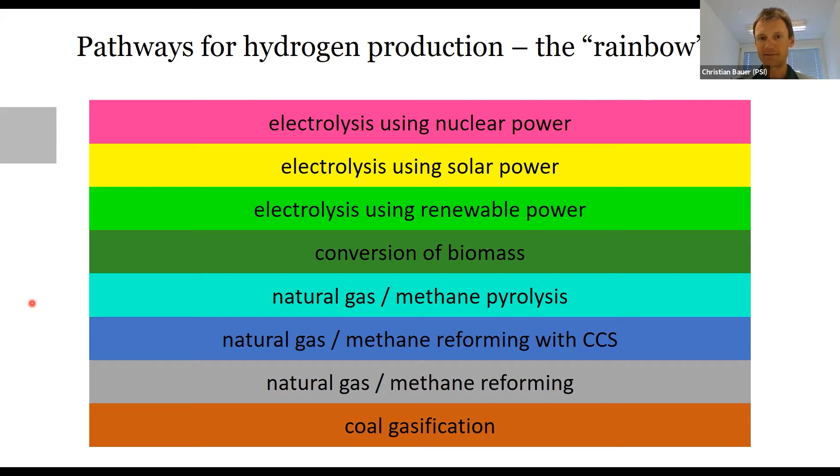And in my talk now, in the 15 minutes I have, I will focus on those pathways, basically electrolysis using renewable power, or also some current power generation mixes, a few words about biomass conversion, and then more on the natural gas conversion pathways with and without CCS, because basically in the public discussion, it's often a kind of competition between the green hydrogen using electrolysis and renewable power, and the blue hydrogen with natural gas conversion with CCS.

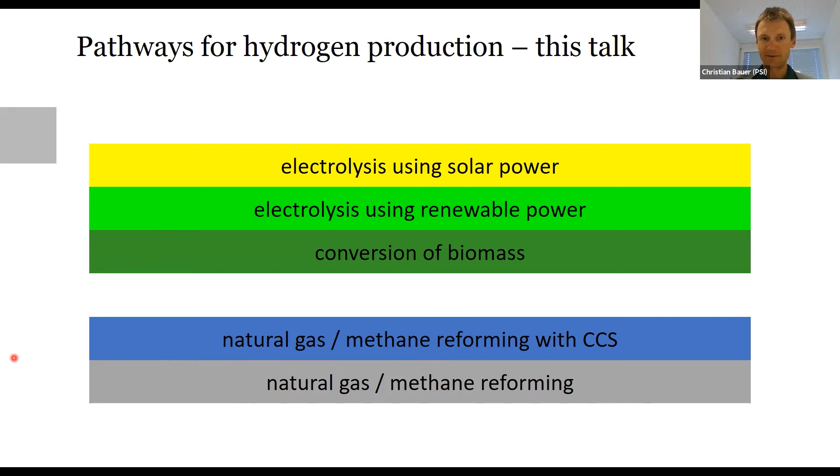And I think that's not always very productive. And I think I can provide some facts for decision making also. And that's the goal of this talk today. So what do we have to do when we want to quantify the greenhouse gas emissions of hydrogen production? Well, basically, we have to perform something which is called life cycle assessment.

And the key aspect of life cycle assessment as such is that it quantifies the environmental burdens along the whole life cycle, as the term says, of a product, of a service. And that means that all material and energy flows along the life cycle from the production of a good or service, its use and its end of life are taken into account. And with such a comprehensive perspective, one can basically compare different products and services in a balanced way, and quantify not only greenhouse gas emissions but also other environmental burdens. But for the sake of this talk, I'm focusing on greenhouse gas emissions.

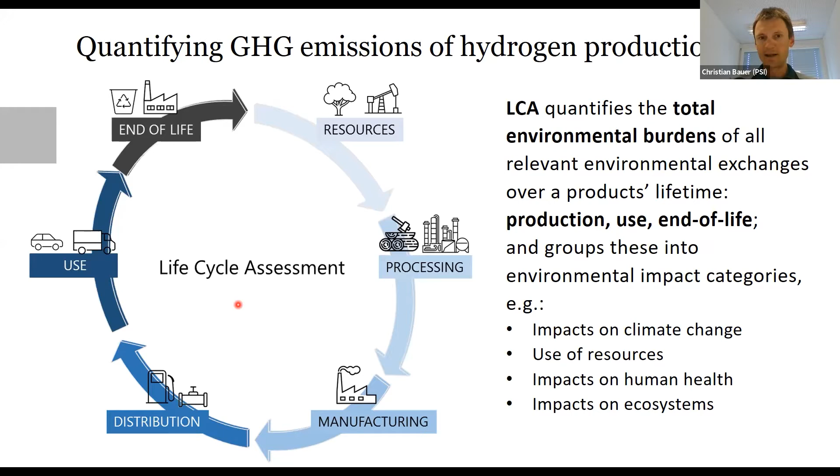Now, if you think about this concept a bit more, then you realize quickly that in the end, it's a complex exercise. Just think about washing your clothes. That needs a washing machine which needs to be produced and operated, and then probably recycled at the end of its life. Operation of the washing machine needs electricity, for example, from a wind turbine. This needs to be produced, operated, and then recycled at the end of its life.

All the components of both the wind turbine and the washing machine need transport activities, and also the lorries have to be produced, operated, and disposed of. And maybe in all this some web service is included. That's why you need some internet, and also that has to be taken into account.

And in the end, it turns out that life cycle assessment basically always tries to represent the whole economy in a way, because all those processes are interconnected. And of course, in the life cycle of hydrogen production, not everything is equally important. And I will show you the most important elements in a minute.

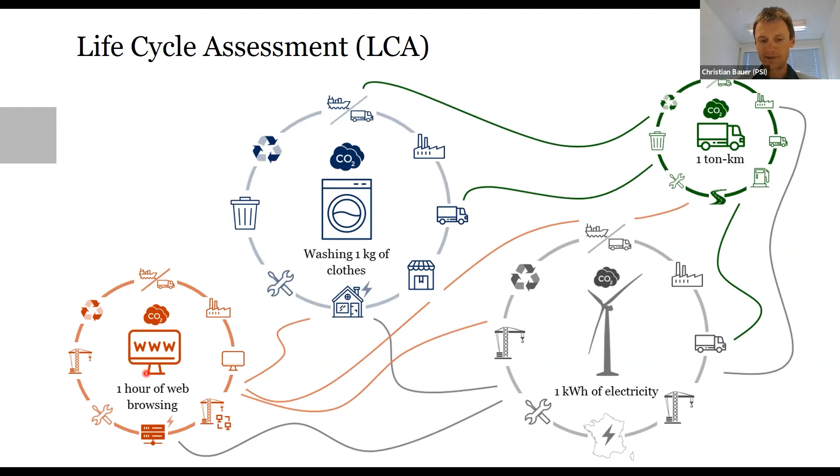But now back from the washing of clothes to the focus of my talk. Basically what I want to present is a comparison in the end of greenhouse gas emissions associated with hydrogen from electrolysis, with the greenhouse gas emissions associated with natural gas reforming, with and without CO2 storage, and a few words about the biomass conversion pathways as well.

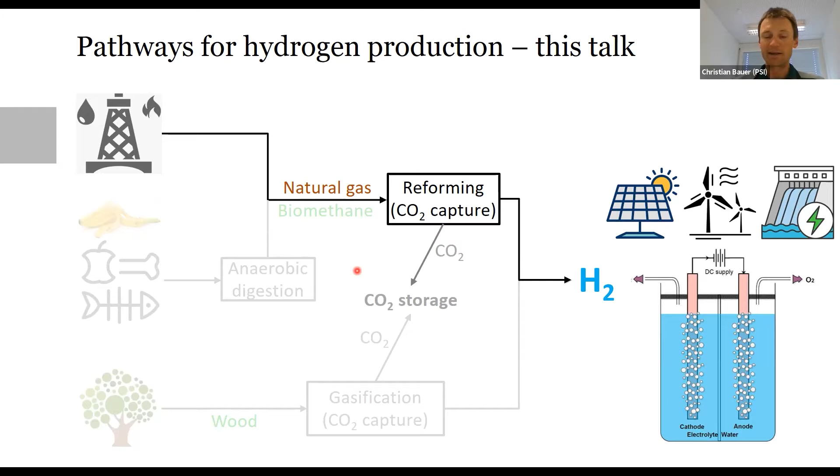But in the context of biomass conversion, one always has to take into account that the resources, the sustainable biomass resources, are very limited, and there's also competition for other uses. So in the end, if we think about large-scale hydrogen economies, I think only these two pathways are realistically able to provide or to supply large amounts of hydrogen, which might be used in the future.

So key parameters in the life cycle of hydrogen production, either from electrolysis or from natural gas reforming. Well, for electrolysis, it's actually pretty simple, because the most important factor is the greenhouse gas intensity of the electricity consumed, and the, let's say, fixed contribution from the infrastructure construction, like the electrolyzer, is relatively minor in terms of impacts on climate change.

That's why, if one knows the electricity source used for electrolysis, then it's basically already answering the question whether the hydrogen produced from it is low in terms of carbon emissions or not.

Of course, if we think about electrolysis directly coupled with renewable electricity generation, then today at least it's not really profitable or in any way economic, and that's why often this electricity from the renewables is supplemented with some electricity from the grid, and that also has to be taken into account in the overall carbon balance.

Hydrogen from natural gas with CO2 capture and storage is a bit more complex in its life cycle assessment, because there are basically two, or one can also say three, key elements in that. One is the CO2 removal rate at the hydrogen production unit, with different options there in terms of technology and CO2 capture rates. And the second very important factor here is the methane emission rate along the natural gas supply chain.

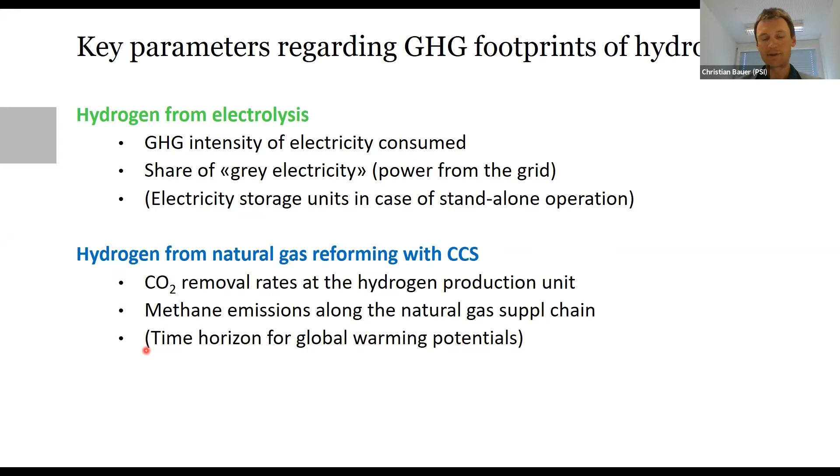And then this third point here in brackets: if there are substantial methane emissions along the natural gas supply chain, then also the time horizon for the global warming potentials becomes important, because if we compare the 20-year time horizon to the usually used 100-year time horizon for quantifying global warming potentials, then we realize that there's about a factor of 3 in the impact of methane, and that's why these methane emissions along the natural gas supply chain become much more relevant if we look at shorter time horizons.

So that's what I've mentioned already before. Electricity production related greenhouse gas emissions are the key factor for electrolysis. And what you see here, I guess most of you are familiar with that, is that coal power has the highest life-cycle greenhouse gas emissions per kilowatt hour of electricity, followed by natural gas, and with some margin then at the lower end, all the renewables and nuclear power.

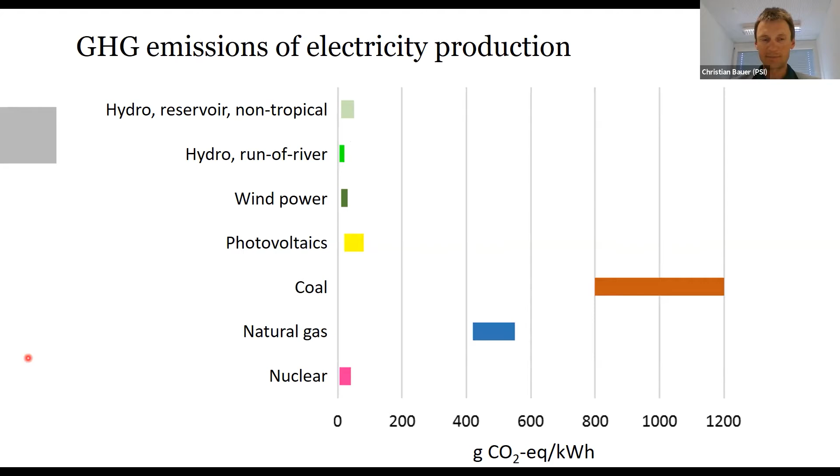So it's basically showing that if we operate electrolyzers with this kind of electricity, then the hydrogen can be considered as low carbon fuel or feedstock, and that will become clear in the next graphs.

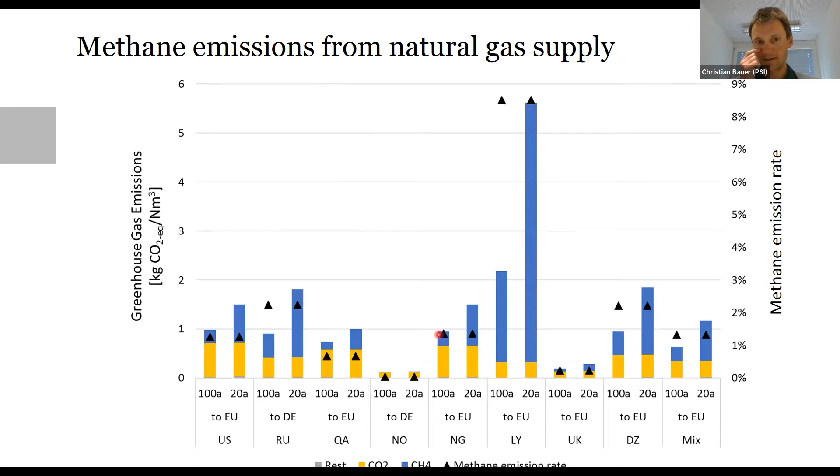So the 8% was this dysfunctional natural gas infrastructure. The 1.5% corresponds about to the current European supply mix, which has substantial shares of imported gas from Russia, and that's why emissions are not close to zero here. And the 0.2%, I think, is the goal of the natural gas extraction association or something like that. So Norway, the Netherlands, UK would be in this order of methane emission rate.

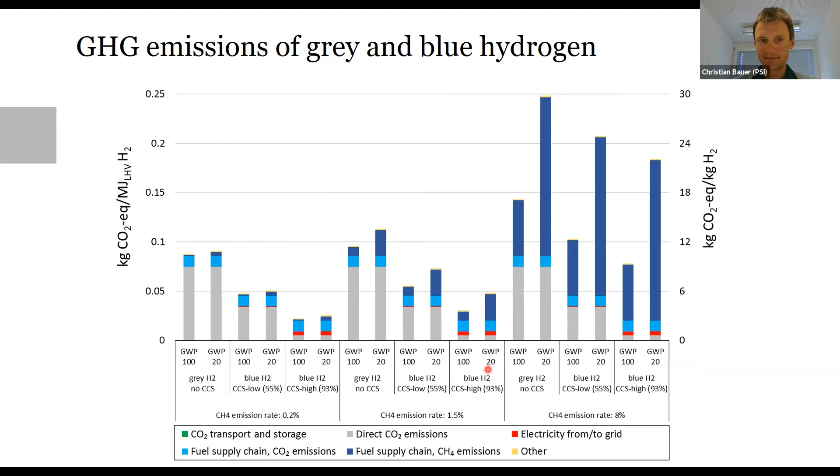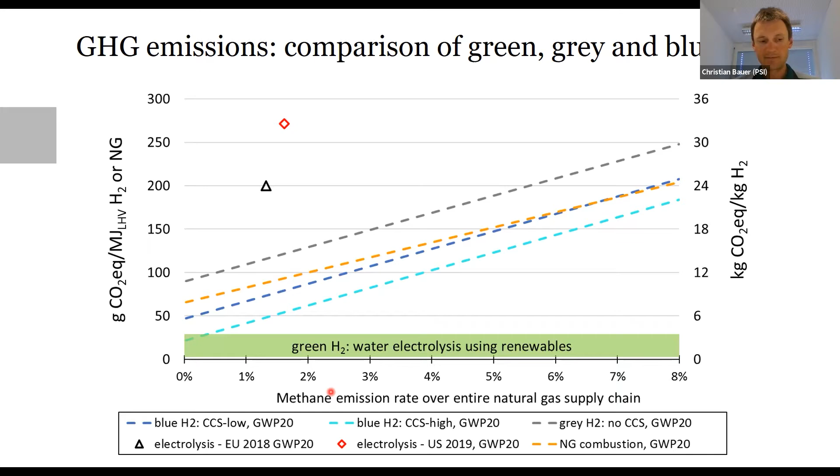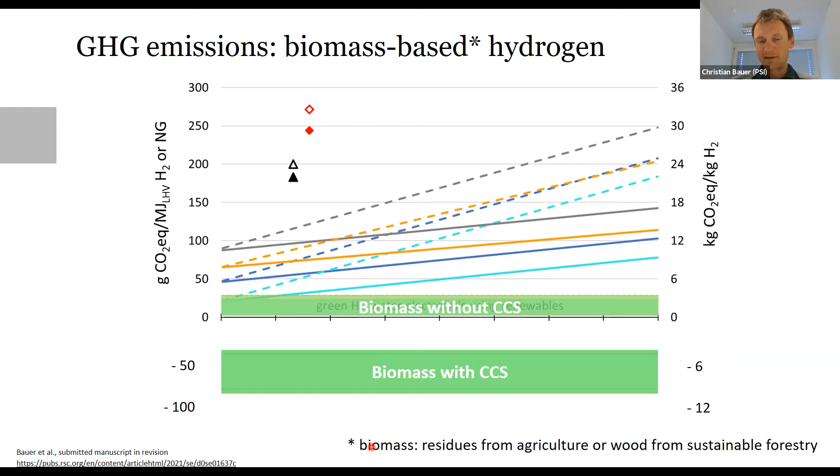So those cases are not included in this graph, but it basically shows that if one uses such kind of biomass with CCS, then one can generate negative emissions by removing CO2 from the atmosphere. I think even if this kind of biomass is a limited resource, it's still an important lesson to learn.

So with this, I think I'm in any case running out of time, so I will finalize with some key messages and some comments in the larger context. What I was trying to show and hopefully showed is that blue hydrogen definitely can qualify as a low carbon energy carrier or feedstock under the condition that the methane emissions along the supply chain are minimized, optimally below 1%, or the lower the better, of course. And then we need at least 90% CO2 removal rate at the hydrogen production, and I think this is feasible with current technology.

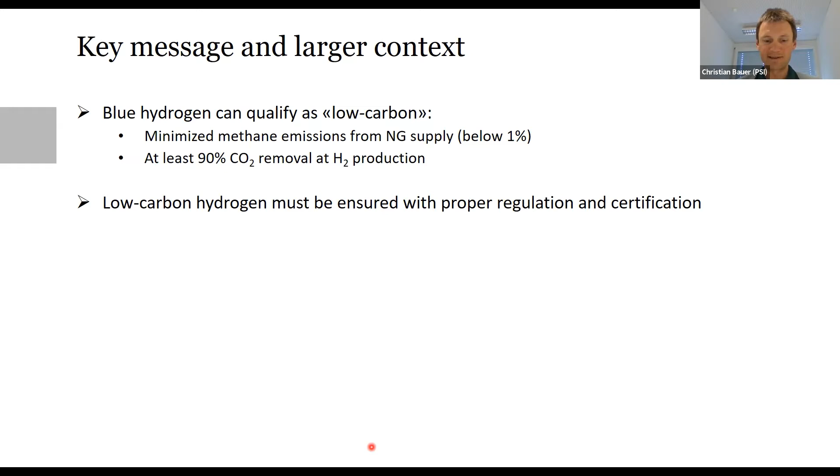But there's a but. These conditions have to be ensured by proper regulation and certification. And I think that's really important because, from a personal perspective, in any kind of industry which wants to go green or climate friendly or low carbon, we see that some greenwashing activities are taking place. And I think we really have to make sure that this doesn't have a negative effect on the true climate balance and climate impacts of hydrogen, because if we're talking about a hydrogen economy on a large scale, we really have to make sure that the hydrogen used there is climate friendly. Otherwise it doesn't make sense to use it as a measure against increasing temperatures.

Since both blue and green hydrogen qualify as low carbon energy carriers, I think they can and should play important roles. To which extent they will develop depends a lot on costs and CO2 pricing, and also ability of the industry in terms of scaling up their production. And finally, as a concluding remark, hydrogen needs to be supplied in large quantities for achieving these net zero goals. And the most promising use sectors, from my perspective, will definitely be industry and aviation, maybe also shipping and long distance road transport.

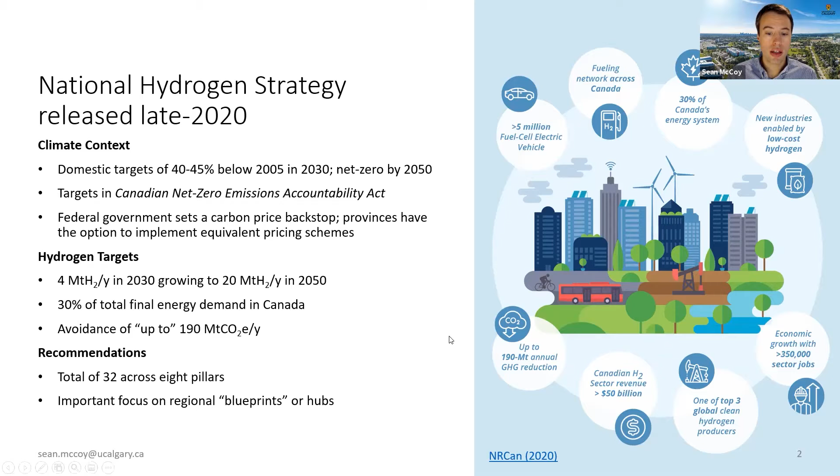They then make recommendations, a total of 32 of them, spread across 8 pillars. They include strategic partnerships, de-risking investments, innovation, codes and standards, enabling policy and regulation, awareness, regional blueprints, and international markets. And I think the most important thing, personally, for the Canadian situation is this idea of regional blueprints, which I think you could translate to hubs, thinking about development of hydrogen hubs in Canada. So let's take a quick look at where across Canada things are with respect to those sorts of hubs.

For example, Quebec, Labrador and Newfoundland, in fact, as well, but Quebec and Manitoba, and to a certain extent Ontario, these grids tend to be generally low carbon intensity already today, with large hydroelectric resources. If you took the average across Quebec, Ontario, and Manitoba, it would be probably close to zero in terms of operational emissions. Then you have to add in properly the life cycle emissions from, for example, hydro reservoirs in Quebec, and fuel chains and things like that.

Nuclear, there's a lot of nuclear in Ontario. So this would be very low, nonetheless, low emission electricity. If you looked at Christian's graph, it would be grid intensity that is quite low, getting towards where you have this sort of green hydrogen number start appearing in his plots.

And if we look over to Alberta and Saskatchewan, on the other hand, we see a much higher CO2 grid today with strong use of coal, particularly in Saskatchewan. Many of you know that's where the Boundary Dam CCS project is. Unfortunately, they've only done that on one plant, and they have many other coal plants that are unabated. There is a plan to phase out coal across Canada. Alberta is well on its way to doing that. Saskatchewan is less excited about that plan. But right now, the grids are very high CO2 today.

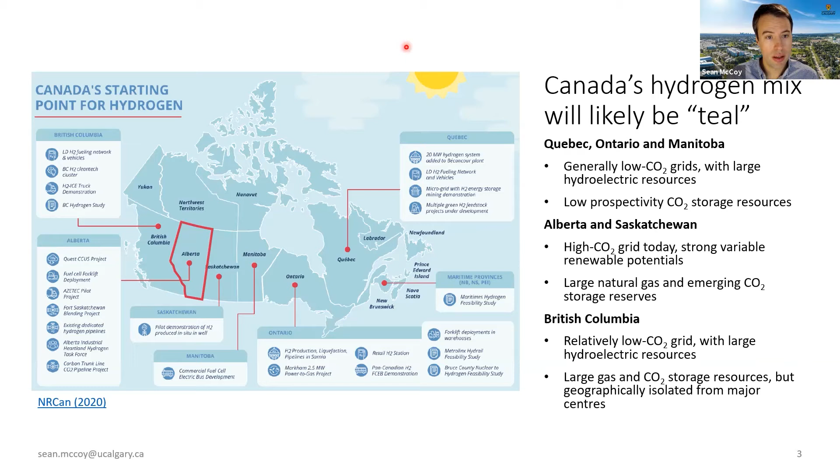And so let's jump into taking a look at the Alberta situation now. The existing hydrogen market in Alberta is enormous. Right now, we have something like 5,400 tons a day of hydrogen that we're producing, primarily from natural gas. Now, this is not hydrogen for mobility. This is not hydrogen as an energy vector. It's hydrogen as a feedstock for heavy oil upgrading and refining typically. But we also use maybe 10 or 20% for fertilizers and methanol production.

There's about 2,000 tons a day of hydrogen being produced there, and we already have production of blue hydrogen happening. Now, this blue hydrogen would be what Christian referred to as sort of a low capture rate. This is from the Shell Quest project, which is at the Scotford Upgrader.

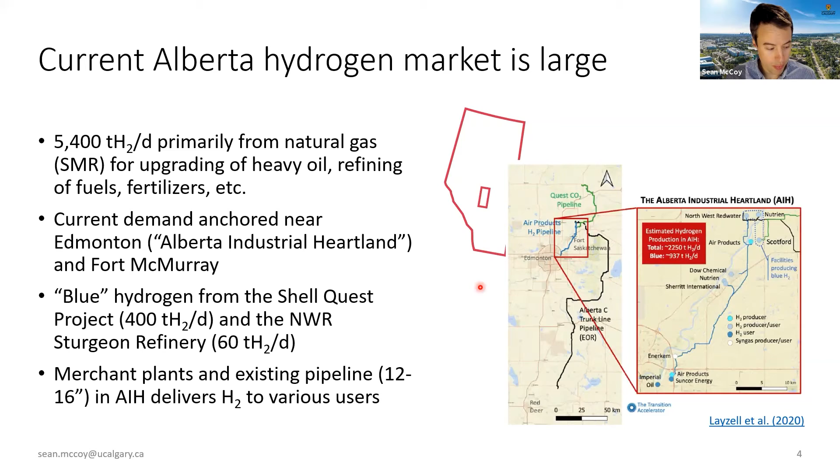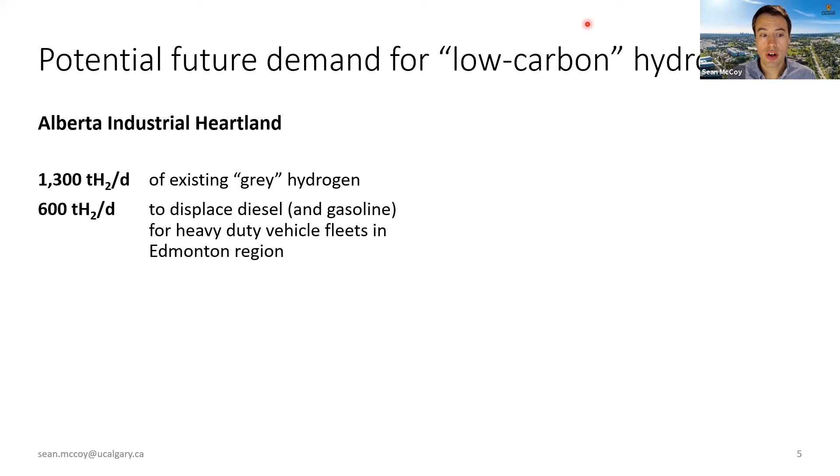So what would the potential demand be? I've talked about there being 5,400 tons a day of hydrogen being produced in Alberta. What would the potential demand look like? Based on some studies done in the Alberta Industrial Heartland by a group called the Transition Accelerator, which has been specifically formed to do this work, and I was an advisor to this one, we guessed that there was about 1,300 tons a day of existing gray hydrogen, 600 tons a day of hydrogen that could be used to displace diesel use, and potentially some gasoline, in heavy duty vehicle fleets in the Edmonton region. And we looked at this from a number of different angles, so this is a pretty robust number.

And potentially 1,500 tons a day for space heating. Now, whether that makes sense, I think, is a really interesting and open question. And it's highly variable, because in the summer we don't have much demand. In the winter, we have lots. When it's minus 40, the challenge is a heat pump looks a lot like a resistance heater. So there may be a case for some hydrogen in the gas grid here. And in fact, there are some projects looking at doing that injection.

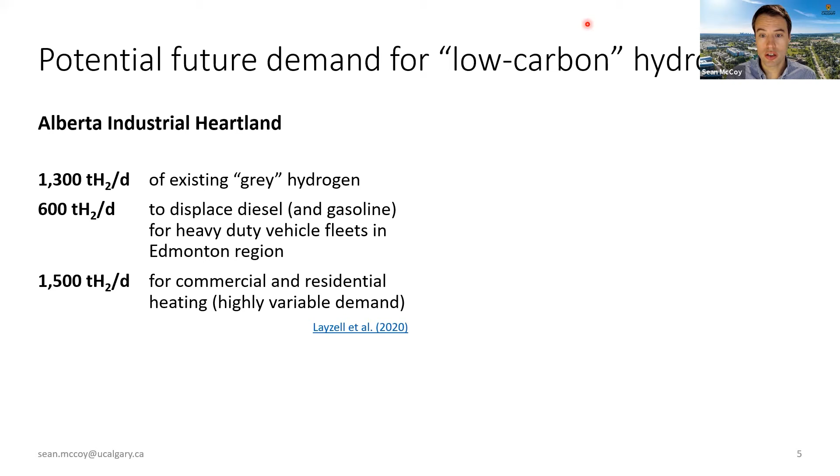If we went up to Fort McMurray, based on some numbers that a grad student of mine has run, there'd be something like 2,000 tons a day of existing gray hydrogen that could be switched to blue. Hundreds of tons a day of hydrogen could be used to displace diesel. And it's actually not diesel, it's a distillate fuel that you couldn't put in your car and call it diesel, but it's used for oil sands mine trucks. So these are the enormous dump trucks that are moving around bitumen, well, actually the sand containing the oil.

And then there's almost 15,000 tons a day of hydrogen that could be generated to displace natural gas for oil sands process heat. So for decarbonization, basically a distributed pre-combustion capture system. Whether that makes sense is a really interesting question. The companies and consortiums are actively looking at that now, and it's competition between CCS on the sites or hydrogen being moved to those sites.

And we've actually done some work, and I was on that, and I've been pretty surprised that unfortunately the cost of getting hydrogen all the way up there, or building hydrogen production all the way up there, makes it a little more expensive than you might think. But of course, there's an unknown export potential of hydrogen, ammonia, synthetic fuels, and so many caveats here, of course.

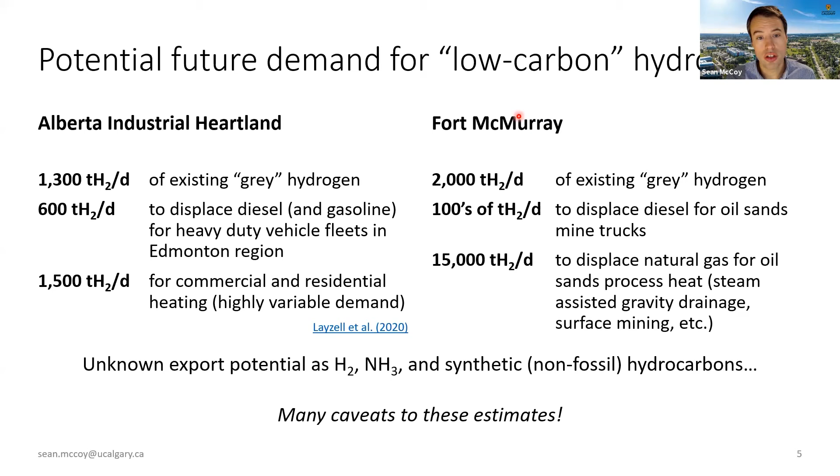But if I added this all up, this would be about 3,500 tons a day in the Alberta Industrial Heartland, or 1 million tons a year of hydrogen. And Fort McMurray could be like 6 million tons a year if you really thought about using it for fuel gas. So these are huge chunks in that 20 million tons in 2030 number. And we're actually taking steps to doing that now. So there have been multiple projects here announced in Alberta. This isn't an exhaustive list, but I think I've captured all the big ones.

Right now, we have projects being proposed, 4 of them that are really notable, that range in capacity from 1,500 tons a day at the large end down to maybe 500 tons a day. And these are estimates. Some of the projects are quoting per year. This Shell Polaris project doesn't actually tell you how much hydrogen they're making. They just tell you how much CO2 they're going to catch, interestingly.

And they range in where they're going to be going, from refining. You see a lot of these going into refining. So these will be replacing that 1,300 tons a day of gray hydrogen that's currently used. Some being talked about injection into the gas grid. And this Air Products plant's talking about having liquid hydrogen for vehicle fleets, a small amount that would be directed there, and presumably the rest into other sort of merchant uses.

And there is one project by Mitsubishi and Shell that's been proposed. It's not really clear where it sits, but it was a very recent announcement where they want to move the hydrogen to export markets as ammonia. So very interesting emerging slate of projects here. If you added all this up, this is something like 3,000 tons a day of hydrogen, I would guess, including the unknown from Shell. So this approaches the total demand that we estimated for the Alberta Industrial Heartland, which is quite interesting.

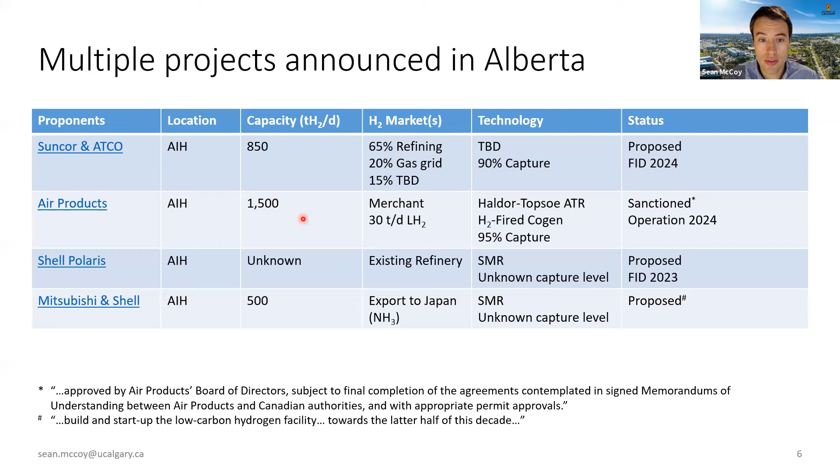These projects, if you added up this capacity, need about 10 million tons a year of storage. So the question is, do you have that? And the good news is probably. So Western Canada has been the site of study after study on storage. If any of you works in storage, you know that Stefan Bachu has studied the Alberta Western Canadian Sedimentary Basin extensively. And so there is a lot of capacity. The basin extends from northern British Columbia through to southern Saskatchewan, and into the US, but in that Canadian section, you'd see something like 300 gigatons of potential capacity.

Of course, that's potential. It's a resource, not a reserve. And so additional work is needed to get there. The positive news is that we are doing that work now. We probably have tens of millions of tons a year of work that's been done to demonstrate real injectivity. We have a law that governs access to the subsurface. That's been clear for many years. We have a system for post-closure stewardship or post-closure liability management, and the regulator has the tools.

The challenge, however, is that recent government moves have created some uncertainty here. They've announced a new process to access the pore space. And what you've seen is there are a whole bunch of hydrogen announcements and everything's gone on hold while the government goes through a request for information and a request for proposal process, because in a nutshell, they're trying to force creation of hubs by the way they allocate the rights to storage in the subsurface.

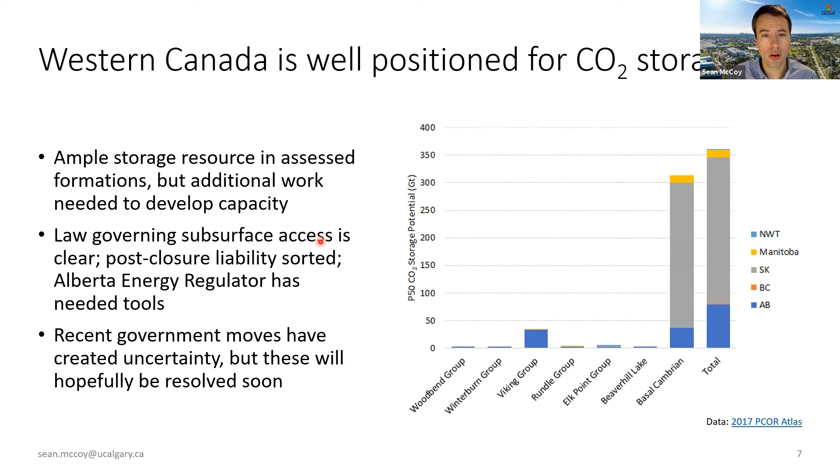So they're not doing a call saying build a hub, we'll support you. They're saying, tell us you're going to build a hub, and if you are, we'll give you access to the pore space storage rights. So it's interesting to see how that's all going to work out. Very different than things have been done here before or anywhere else in the world, I think, at this point in time. So we shall see.

So I guess let me end up here. I'm probably a little over time. Let me end up with some thoughts on where Alberta goes from here. And I think this ties a little bit back into what we just saw from Christian.

So first, I think we need to acknowledge that hydrogen here in the province is a response to climate change, and we don't need to kid ourselves about that. Climate, and our response to it, is a very difficult conversation here in this province. And we really need to be therefore thinking about the whole cradle to gate, particularly on our upstream gas.

While I think Alberta has done a pretty good job of managing upstream gas, at least in terms of its regulations, that is the methane emissions that Christian was talking about, we need more measurement to really verify this and be able to demonstrate it to the world and sell a truly low carbon hydrogen if we're going to do it globally and make sure we're meeting our commitments domestically.

The second is that we need to really continue pushing development hubs and start figuring out where the markets make sense and are economically viable and what it's going to take to develop them. Right now, it is really hard to see, for example, with that Air Products reformer at 1,500 tons a day, where that hydrogen goes. Certainly it can go to replacing some of the gray hydrogen, but that gray hydrogen is already being supplied. So it's sort of, I think, additional.

And the question is, where's that additional hydrogen going? What makes sense? How do we get it? How do we get the markets developed? We certainly need more investment in CO2 storage. I think anyone in the CCS community would probably say that's of course.

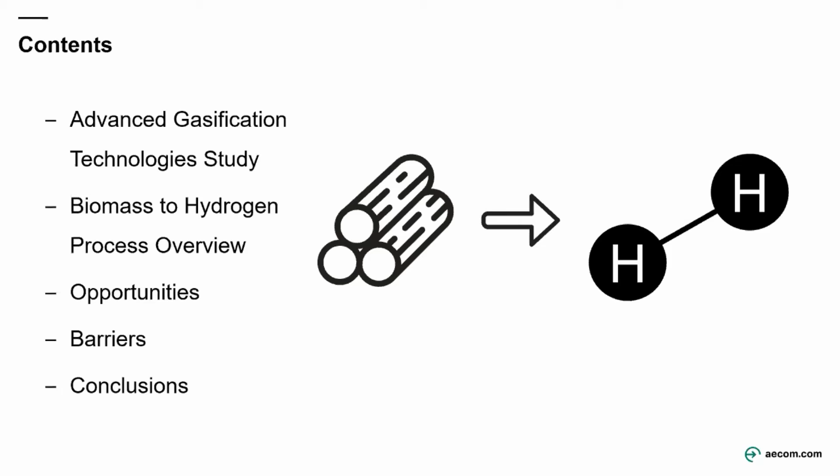Okay, so thanks very much. My name is Stephen Florence. I'm a senior engineer at AECOM in the energy transition team. And I'm going to talk to you a little bit on hydrogen from biomass and a study we did to do with advanced gasification for the UK government. So I'm going to run through a bit about the study, give a sort of process overview of the biomass to hydrogen, and go through some of the opportunities and barriers for these technologies, and give you some of the conclusions.

So the study itself was called Advanced Gasification Technologies, looking at converting biomass and municipal solid waste to a range of fuel products, including hydrogen, but also methane, methanol, and FT fuels. The study also encompassed the current status of the AGT technologies, as well as looking at the next generation of technologies being developed.

Then the later part of the study performed some techno-economic analysis of various options for the technology for each of the different fuels. And there was a particular focus on looking at the opportunities and the barriers to bringing these technologies into fruition, essentially. And this work was conducted with Fichtner Consulting Engineers as well, and was performed for the UK Department of Business, Energy and Industrial Strategy.

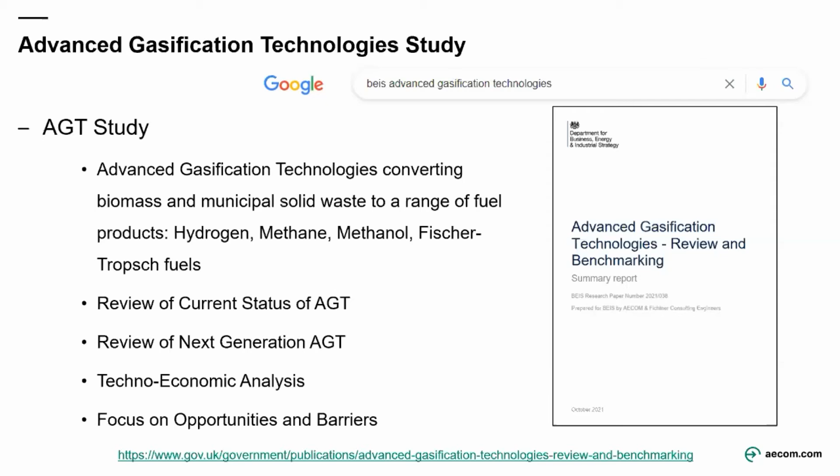So some of the key messages coming out of our study was that the CO2 balance should be studied further. There's a lot of potential in this area, and we'll touch on that later in the presentation. A realistic approach to feedstock availability and utilization is required. We don't want to be taking biomass that has better uses away from those to use it here, essentially. And again, we'll touch on this a bit more.

And the other big takeaway was that the technology is still very much in a developmental stage. It's not fully commercialized. It's not a mature technology necessarily at this point in time.

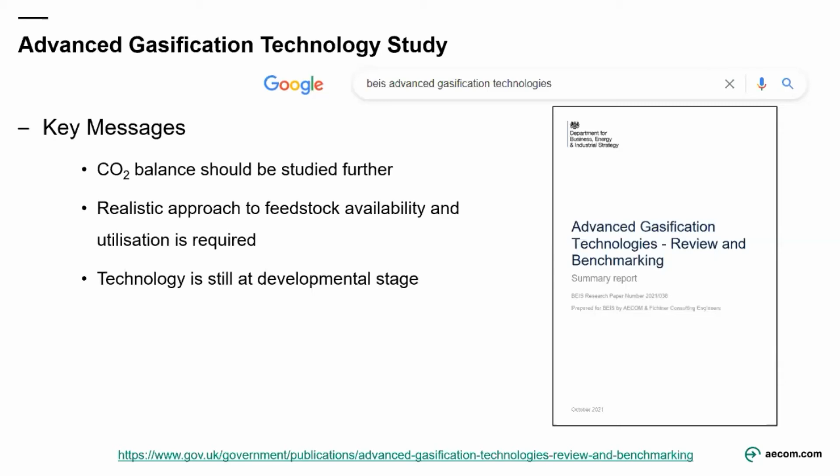Depending on the biomass source, you could have quite a high moisture content, or potentially you could have a drier source. One of the key messages on the feedstock preparation is the cheaper you go on the feedstock that you bring in, it might look economical at first, but it's going to lead to an increased level of contamination in your feedstock, which will lead to an increased complexity on your preparation, which is then an increased risk to your process and potentially an increased cost. So things like wood pellets will be far easier to process than, say, municipal solid waste.

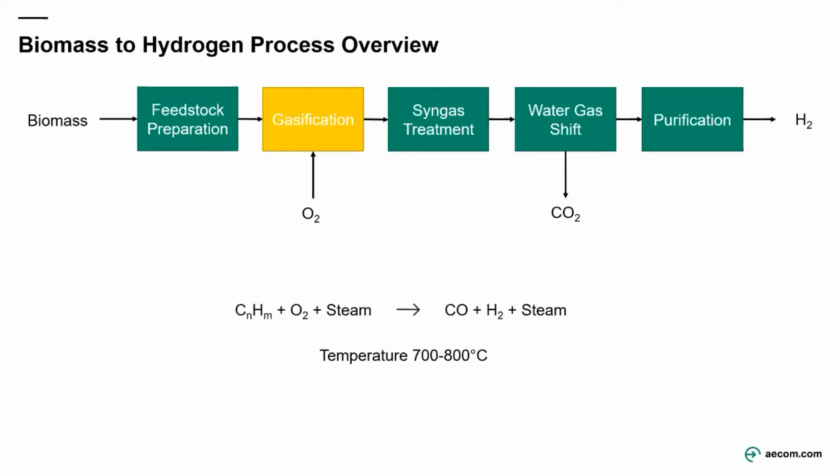Moving on to the gasification. This is the core technology. There's a few different types: fluidized beds, entrained flow, fixed beds. The study mainly focused on fluidized bed technology. Essentially in your gasifier, you're taking your feedstock hydrocarbons, whether it's from wood pellets or municipal waste or wood chips, exposing it to oxygen and steam at temperatures in the range of 700 to 800 degrees Celsius, and then oxycombusting to gasify it to a syngas, where you're trying to optimize the concentrations of carbon monoxide and hydrogen in that syngas.

From your gasifier, you then move through into the treatment of your syngas. There's various options that you might apply to essentially help remove contamination. You could have cyclones for removing entrained particulates and droplets, scrubbing to remove tars and ammonia, activated carbon beds for removing metals, and so on. I won't go through all of them there.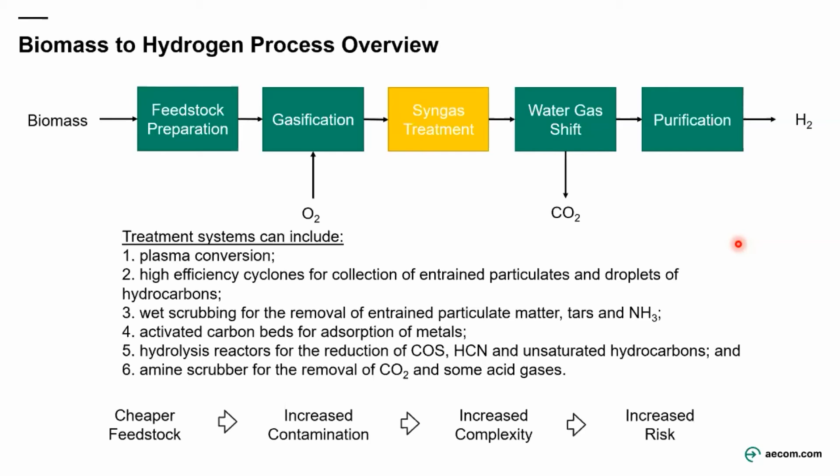But again, this ties back into that original message on the feedstock preparation, that if you go with a cheaper feedstock, you're going to have an increased level of contamination coming through your process, and that's going to lead to an increased complexity in your treatment to remove these contaminants, and then an increased risk to your project just due to the complexity, more stuff to go wrong, more things to remove, etc.

So your treated syngas then moves forward into a water gas shift reactor. Here the carbon monoxide and the steam are shifted, so you produce your carbon dioxide and hydrogen. There's two forms of this water gas shift reaction. You have a low temperature version, which uses a cobalt molybdenum catalyst at around 200 degrees, and you have a high temperature version, which operates around 500 degrees Celsius and uses a chromium or copper promoted iron oxide catalyst.

The CO2 that is produced in the water gas shift is removed using a solvent-based process, and it produces a very concentrated stream, typically over 90% CO2, which is therefore very optimal for capture and sequestration, or potentially utilization as well. So it's very advantageous for capturing the CO2.

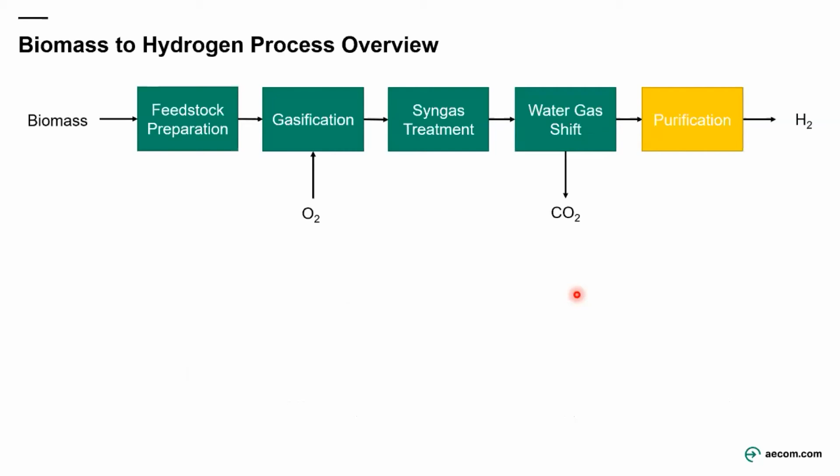The final block of the process is the purification of your hydrogen from your gas shifted syngas. This is typically done using pressure swing adsorption, followed by further purification steps as may be required to meet your end use for the hydrogen. This is where other technologies such as electrolysis might have an advantage in being able to produce a purer hydrogen without further processing. But there are industries where it's still very much applicable to use the hydrogen from pressure swing adsorption. Things like steel production will probably be a good target for this technology.

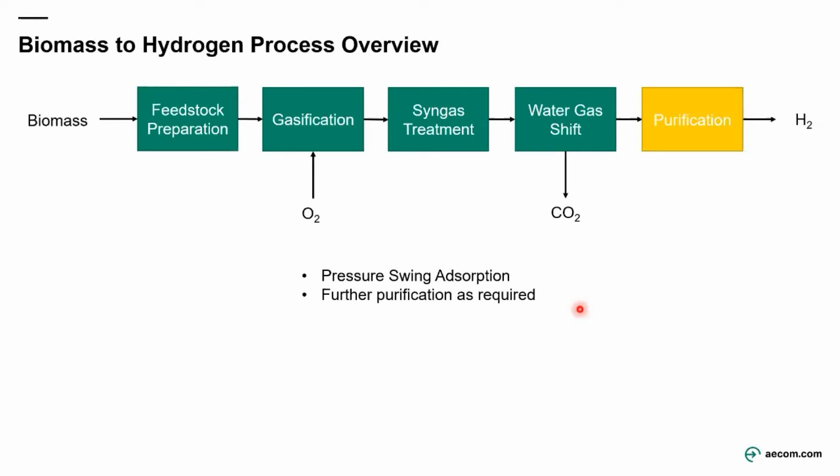So currently, there's a few companies operating in this area, looking at converting biomass and biomass-derived fuels into hydrogen. One of these is a company called Kew Technology. They use a feedstock of densified refuse-derived fuel, their gasifier is a fluidized bed, and they're targeting producing hydrogen, but they're also interested in producing electricity and liquid fuels.

In the course of the study, their current development status was assessed, and currently they're sitting around a technology readiness level of 6. So it's proven in a relatively similar environment, but the whole process overall has not been proven at a commercial scale and environment.

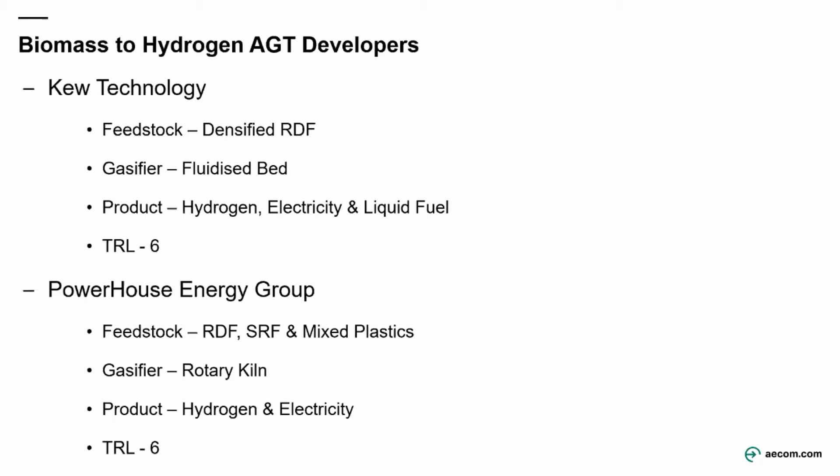Then another developer looking at biomass to hydrogen is Powerhouse Energy Group. Their feedstock is made up from refuse-derived fuel as well, but also solid recovered fuels and mixed plastics. They use a different type of gasifier, a rotary kiln, and their product focus is hydrogen, but also electricity. Similarly, their development stage, again, is they're not fully commercialized yet. It's not proven at that level yet, and they were assessed to be at a technology readiness level of 6 as well.

I believe there are some other developers in this space, but these were the main ones identified in the study for hydrogen. There were a number of other developers identified in regards to producing the other fuels and methane, methanol, etc.

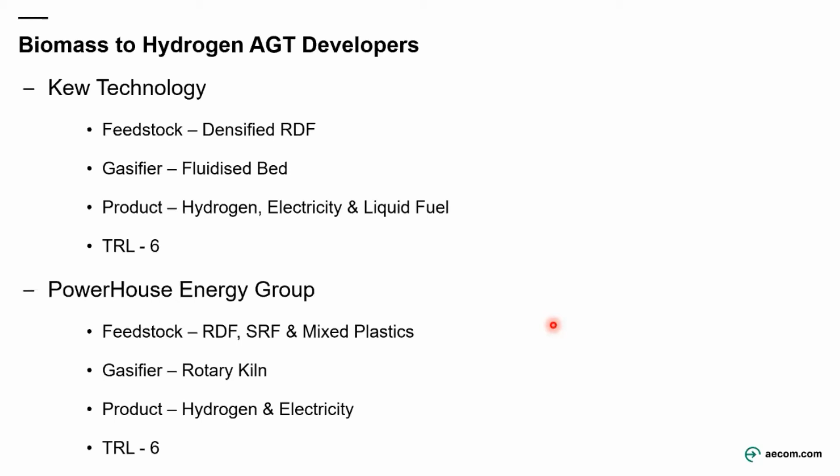Currently, in terms of the study, we looked at higher capacity plants in the hundreds of thousands of tons per day of feedstock, up to 1 million tons per annum, sorry. And currently, the study found that the largest hydrogen example was processing about 5,800 tons per annum. So it was about 6% of the scale of the small plant we modeled. So there's quite a way to go yet to a full commercial output.

So what are the opportunities for biomass to hydrogen advanced gasification? There's only a couple, but they're very high quality, high value opportunities. The first is the production of low carbon hydrogen. I won't go around that too much. We've had 2 presentations that have talked very well on this and its potential. And the other is that it is a carbon negative technology, and one of only a handful. The others being things like reforestation, land use changes, direct air capture, and carbon capture from bioenergy and energy from waste. So it's one of only a few, so there's some real potential on that front.

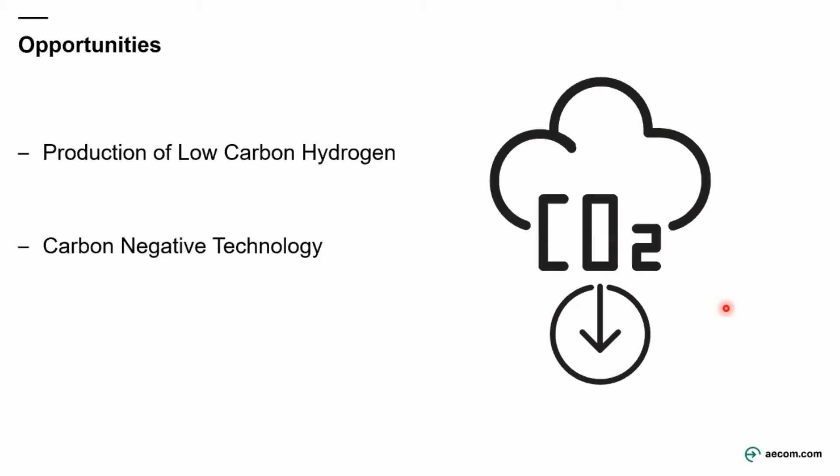But there are a number of barriers to developing these technologies and commercializing them. The first is a supply of sustainable biomass. What we found is it depends on who you ask as to how much there is. And the truth is that there is a limited supply. You don't want to be taking biomass away from other better uses. You don't want to be affecting food supplies by growing biomass specifically to put in an AGT, for example. So the solution is to keep a reasonable expectation of the potential supply of sustainable biomass, and keep that in mind when assessing the deployment scale of the technology.

The conversion efficiency is also a sticking point. For hydrogen, the energy and mass conversion efficiency is quite low because the carbon in your feedstock doesn't end up in your end product, so you're not getting value from it. But the solution there is if you can generate revenue from the carbon dioxide, that would outweigh the problem because you would be making revenue from the carbon.

Product purity: as I said previously, electrolysis might have an advantage here. The purity of the hydrogen is maybe not as high and might not be suitable for all applications, especially where very high purity is required, such as fuel cells, without a lot of further upgrading equipment. But the solution here is to target uses that don't need as high a purity, like steel production, where you could use it without further upgrading.

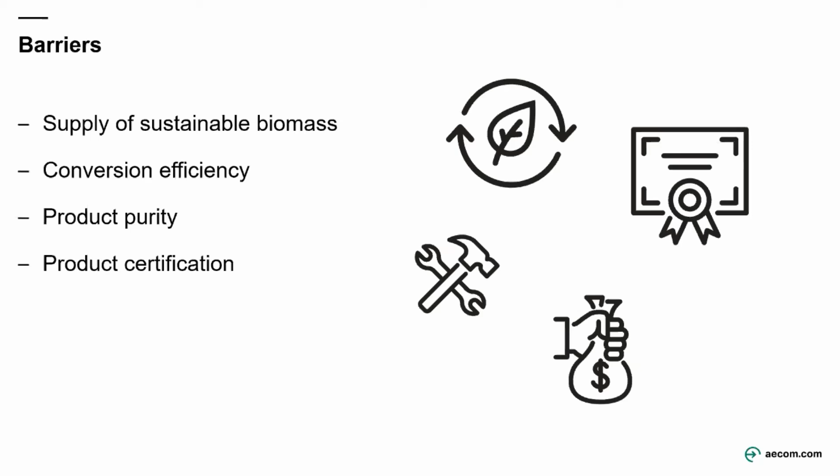A point made in the previous presentations is that currently there is no certification or regulation to accredit low carbon hydrogen, and without that it's going to be difficult to generate additional revenue for it being low carbon, which is required to make the process viable. But again, the solution here is actually being worked on. The hydrogen economy is being really pushed from a lot of places to achieve net zero, so it seems likely this will be resolved in the near future.

Value of the CO2: there's currently not the transport and storage infrastructure or the financial incentives in place to push for revenue and to capture that CO2, and for this process that's needed. The solution here, again, is already in development. The mechanisms are being pushed for net zero and all these projects to capture carbon. So it seems very likely these will be overcome in the near future, which will aid the AGTs.

Availability of technology. So all the existing examples of the technology at the moment are typically smaller scale. Some of them had quite a limited track record of operation. Now the solution to this is probably improving the economics. If there's more value in this technology, then more money will be invested in the R&D and development, and it's likely that those operational issues will be overcome with enough time and effort. And it's also true that of the AGT technology studied, the hydrogen production as opposed to the liquid fuels was arguably the simplest process, so technically more feasible.

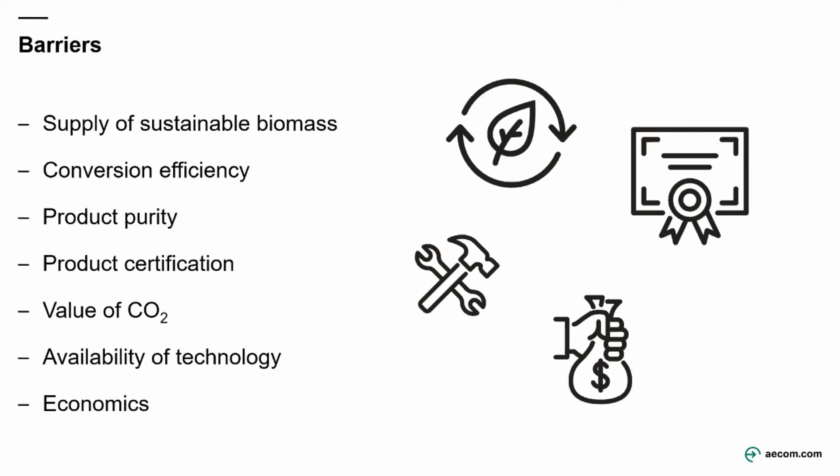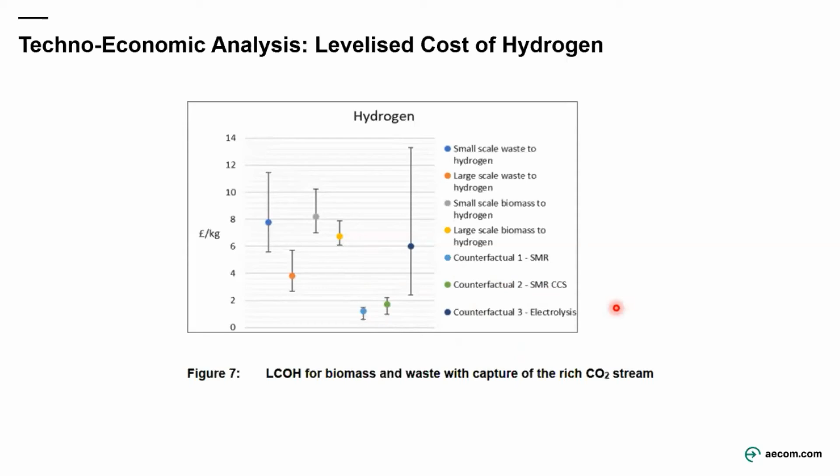So does this technology have potential to be part of the future energy system? The answer to that is yes, it does have some potential. Is it going to solve all our problems? No. Its sustainable feedstock supply is limited, and it has a lot of other uses. So it's never going to be able to fill the full market to provide all the hydrogen we could possibly need or want to achieve net zero.

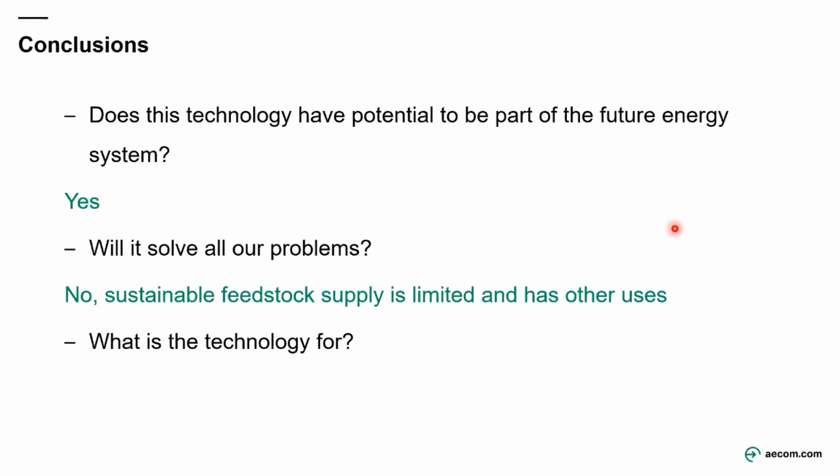What is the technology for? So this is an interesting point, that there's really 2 main products of this process. It's your low carbon hydrogen, but then there's also your CO2 capture from atmosphere, because it's a negative emissions technology. So which one of these 2 would actually end up being the main revenue of the process? That's not really clear at the moment. Until the hydrogen and the CO2 economies are really established, we're probably not going to know that answer. So in 5 years' time, this presentation, instead of biomass to hydrogen, could well be biomass to CO2 capture. So it's an interesting point, and we'll see what happens in the future.

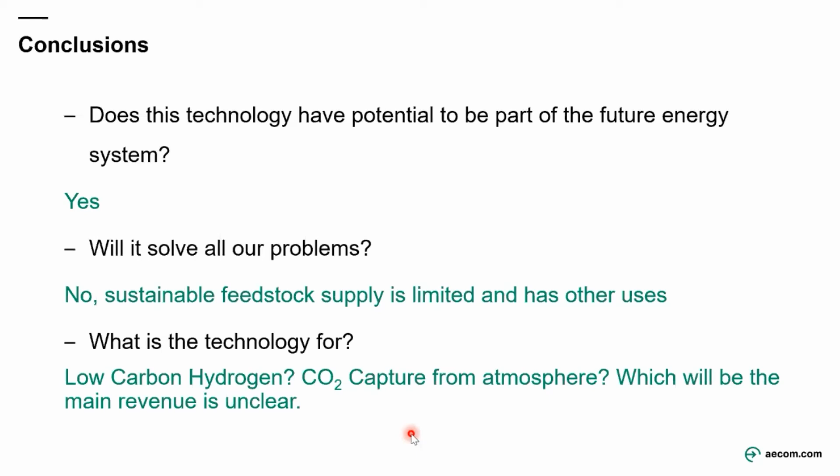I'm actually going to ask you a question to estimate what the uplift might be, depending on the carbon price, because I don't think you quoted that. But anyway, think about that during the coffee break.

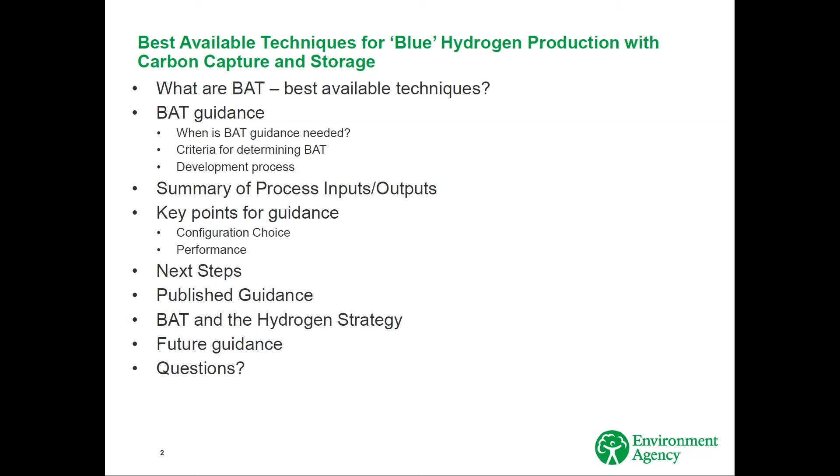So in terms of the details of what we're going to talk about: what is BAT? What is BAT guidance? Just a quick look at the technologies we've looked at, and then key points for guidance, next steps, and what we've published. Look briefly at BAT and the UK hydrogen strategy and future guidance we're going to hopefully publish in the future. Next slide, please.

So what are BAT, best available techniques? BAT are defined in the Industrial Emissions Directive, which is currently the basis of our regulation of industrial processes in the UK, although it's an EU directive. They are the most effective and advanced stage in the development of activities and their methods of operation. They have to be economically and technically viable, and they provide the basis for emission limit values and the permit conditions. We need to prevent, and where that's not practicable, reduce emissions and the impact on the environment as a whole. And the full definition can be found in the directive linked there.

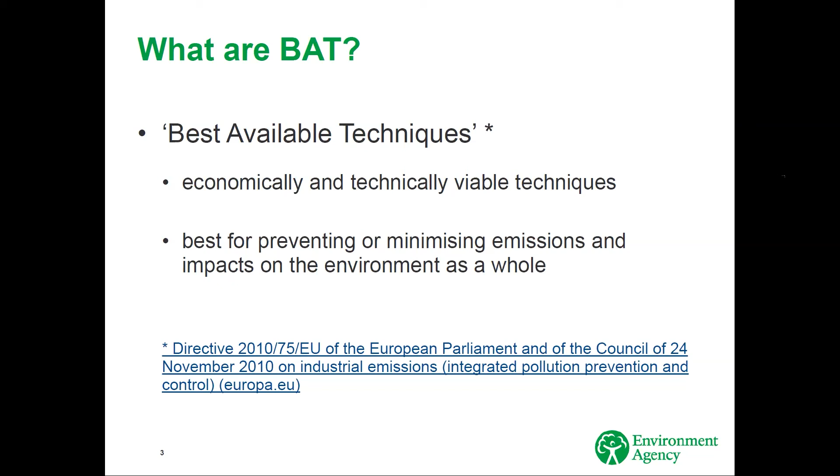Next slide, please. So when is BAT guidance needed? So BAT reference documents, or BREFs, which were previously produced and will still be being produced by the EU's Sevilla process, have conclusions and set BAT associated emission levels and descriptive BAT standards. No BAT reference document covers hydrogen from methane with carbon capture and storage explicitly, and these are considered as emerging techniques, although there are some references to similar processes in ammonia production and the refineries BREFs.

Article 14.6 of the directive requires the regulator, after prior consultations with the operator, to set emission limit values and other permit conditions on the basis of its own determination of BAT, which has to give special consideration to the criteria in Annex 3 of the Industrial Emissions Directive.

The permit conditions must protect the environment and prevent harm, and they cover the basic obligations of the operator, as well as any environmental quality standards which require the operator to go beyond BAT in order to meet the standard. For example, we have air quality standards in the UK. We must encourage emerging techniques, whether or not these have been identified in a BAT reference document. Next slide, please.

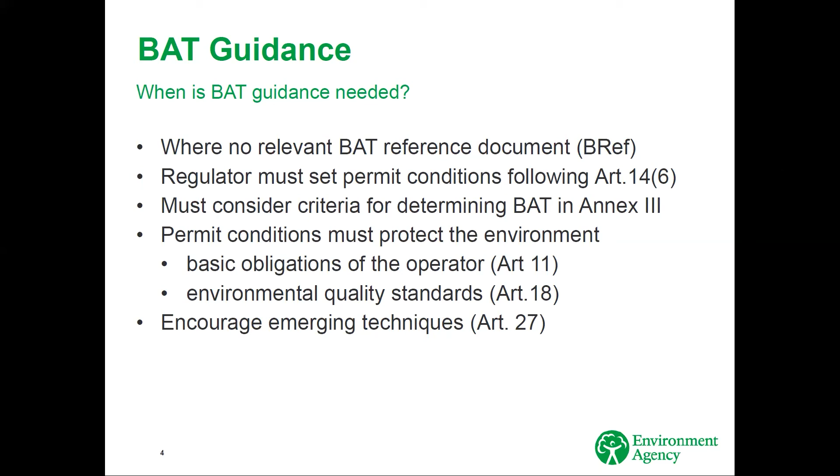So these are the criteria in the annex I mentioned before that need to be considered when we're using Article 14.6. So I'll just leave you to read those through, but they're the typical things you'd expect in terms of environmental permit, looking at emissions, looking at minimizing waste, reducing use of hazardous substances, key topic here, energy efficiency, raw material, water usage, preventing overall impact.

In terms of accidents, these plants are also likely to be COMAH, or control of major accident hazard establishments, which we would jointly regulate with the Health and Safety Executive. And we also take account of published information, which could be international information on techniques. Next slide, please.

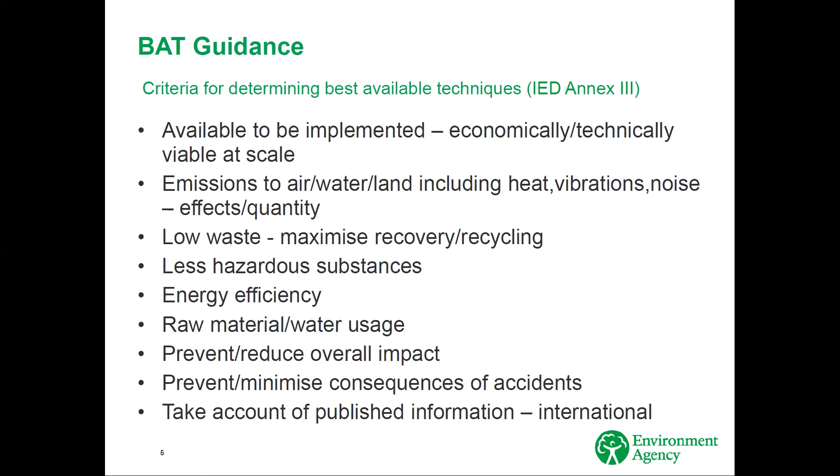So what's the development process for BAT guidance? A BAT review informs BAT guidance. It summarises the available evidence, both published and direct from technology providers and operators, and it identifies the key aspects which will influence the environmental performance and any best practice identified. It's been developed via an iterative process by the contractor Costain and the Environment Agency in consultation with interested parties in industry and agreed by NRW, SEPA and NIEA, who are the other UK environmental regulators, as part of a technical working group.

It will and has already been able to assist applicants to apply for permits and regulators to assess permit applications, but must allow a range of techniques and performance for emerging techniques. It doesn't set BAT standards or limits at this stage, but it will help to identify where evidence is required to enable standards to be set. Data can be obtained under the permit during commissioning and operation of the plant. Pre-operational conditions can also be set.

To note, under the environmental permitting regulations, hydrogen production is an inorganic chemicals activity, as production of hydrogen as a gas, and carbon capture and storage is also an activity, although we would only permit up to the boundary of the installation, not transport and storage. So we're permitting within a boundary, which we call an installation. Next slide, please.

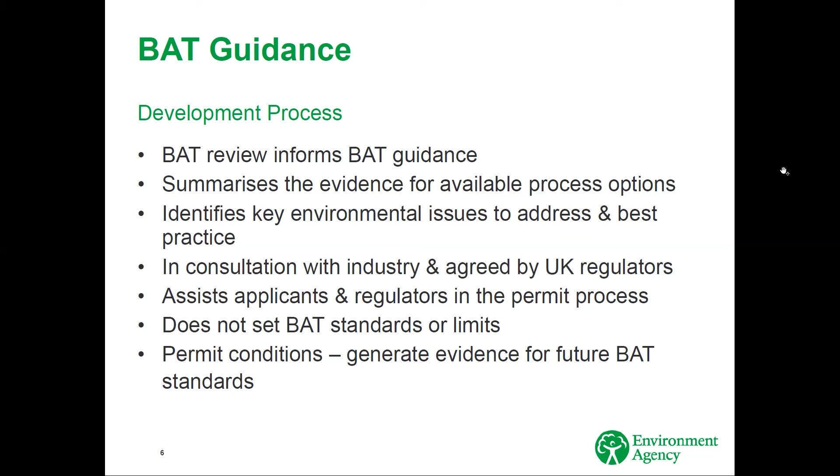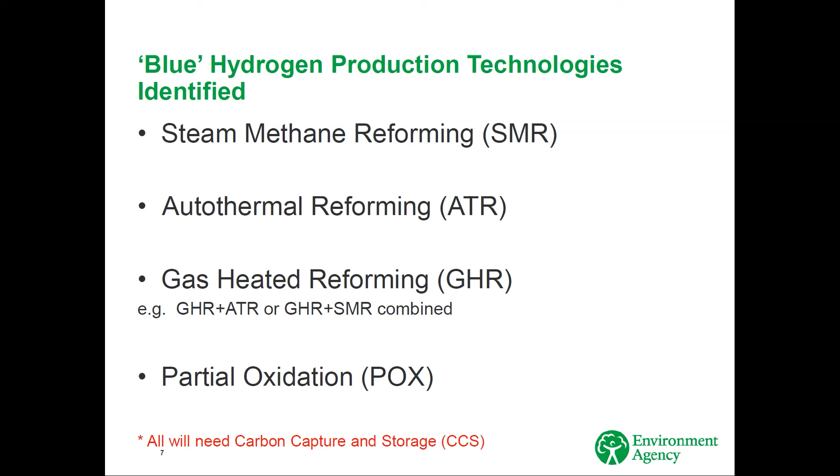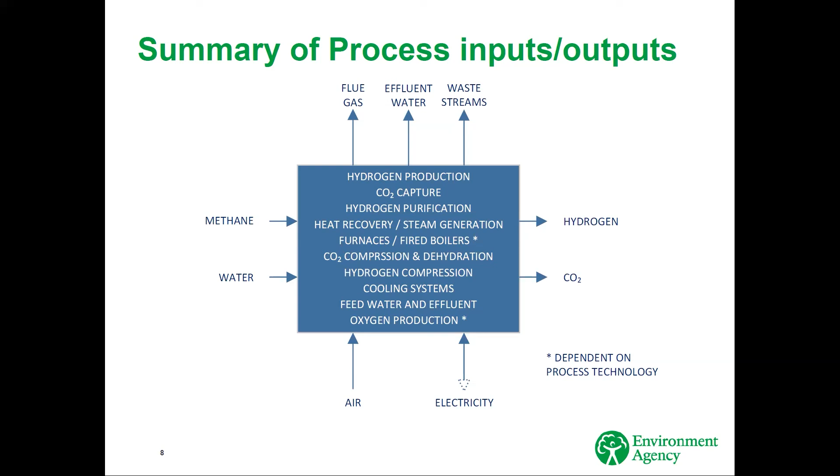This project's enabled an in-depth review of these proposed techniques based on information provided mainly by technology providers. It was clear that the key areas to consider would be energy efficiency and integration, CO2 capture efficiency, raw material efficiency, any abatement required, and all aspects of emissions to the environment. Next slide, please. So just quickly going through the key points that we'll be putting in the guidance, and it's already expressed in a section of the BAT review document.

So overall capture efficiency is obviously key, as has already been mentioned. We're expecting, and the operators and equipment manufacturers have agreed, that more than 95% is certainly achievable, and we'll be pushing that upwards where we can. It's typically, as previously been said, by absorption in the solvent with regeneration, balancing between delivering carbon dioxide at high pressure to storage, but that's limited by avoiding high temperatures, which would potentially degrade the solvent more quickly, in this case usually amine solvents.

The feed gas energy conversion will impact on the total CO2 captured from the process, and the capture rate should be near complete for in-process carbon dioxide capture, and we'd expect more than 95% capture for post-combustion capture where needed in these processes. Carbon in the tail gas, this should be minimised by optimising conversion, and may need post-combustion capture on a small scale.

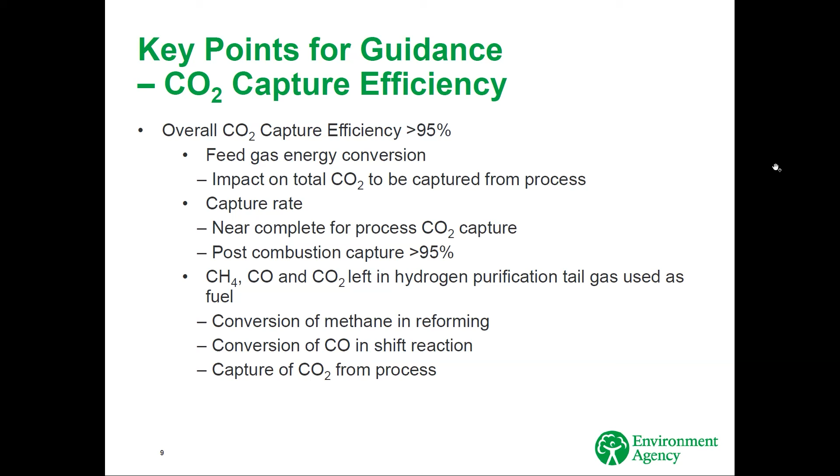Capture efficiency will vary depending on the operating regime. For example, they need to manage if swing production is needed in initial phases of the operation due to availability of users. So obviously, if you've not got a steady sink for your hydrogen, your plant's going to be going up and down a bit, which isn't ideal for the capture efficiency. Next slide, please.

So for energy efficiency, obviously, it's a key part of this. Energy balance is dependent on the technology choice. It defines the electrical power requirement, whether there's any excess high pressure steam to power any drives or low pressure steam demand, and also the power demand of any oxygen supply. So currently the carbon footprint of the external electricity supply is not in scope of the installation's permit assessments. So we don't look at life cycle and the source of the electrical power.

It could be integrated with cogeneration to improve electrical efficiency and operational flexibility. There is a potential for higher thermal efficiency there. In terms of water supply and quality, this is going to be key not only for the hydrogen with carbon capture and storage, but also for any green hydrogen or hydrogen via electrolysis. So water supply, we really have got to involve the UK Environment Agency's water resources teams in assessments for all types of hydrogen supply.

Feed gas quality will determine desulfurization and pre-reforming processes needed to remove contaminants, especially sulfur, to avoid catalyst poisoning, which minimizes waste if you can minimize your catalyst poisoning. Pre-reforming to convert heavier hydrocarbons and some methane to carbon monoxide and hydrogen. In terms of your hydrogen product, there will be a specification, so you may need to consider inerts removal. Any carbon in product streams will need to be accounted for at some point, yet to be determined.

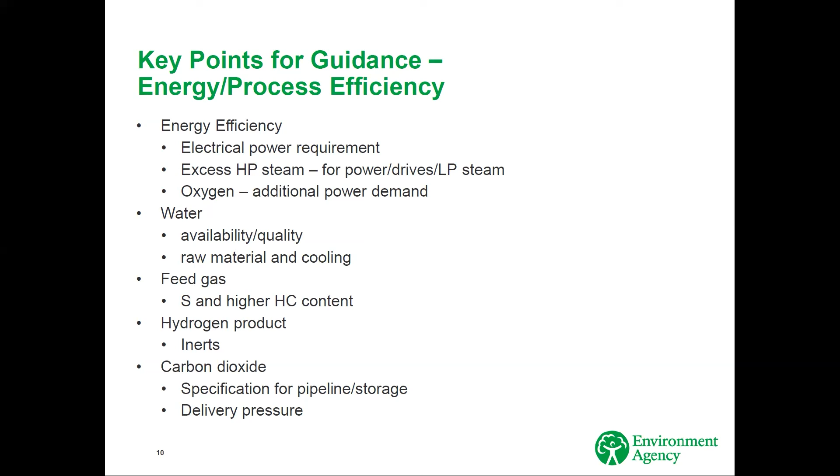So you can't really just sell your carbon through your hydrogen stream, or maybe you can if that's acceptable downstream. But we won't assess that necessarily, or come on to that later. In terms of carbon dioxide specification, that will be defined depending on where it's going to be put. CO2 compression delivery pressure will depend on whether the CO2 is to be transported in the gaseous or dense phase. And this will be a significant energy user to get the CO2 to the right pressure. Next slide, please.

Okay, so where these processes may need post-combustion capture, then particularly the steam methane reforming process, where you've got a large gas fired reformer, which is like a big furnace, you will need post-combustion capture of some form there if that's the process you're using.

Solvent selection is critical. There's a balance between the energy requirement, which tends to be reduced by more complex amines if you're using an amine solvent, but the more complex amines have more potential to form hazardous degradation products within the solvent system, which may result in emissions to air. There's also the potential for post-emission formation of nitrosamines and other degradation products in the atmosphere once it's been emitted. So solvents need to be tested and the performance proven.

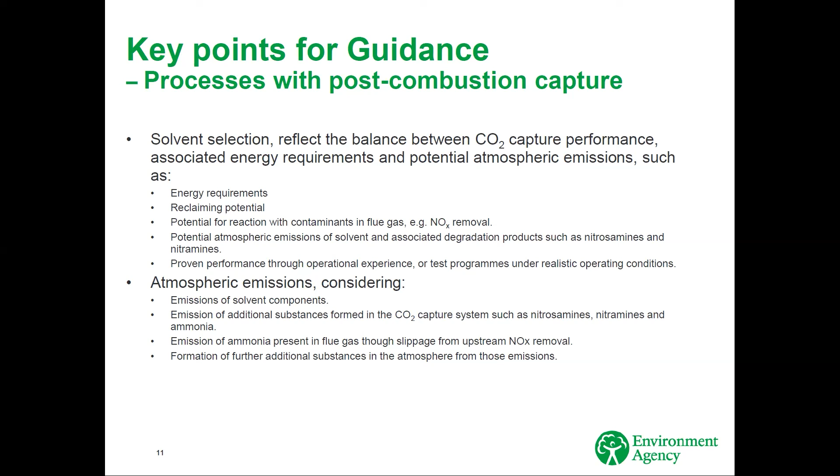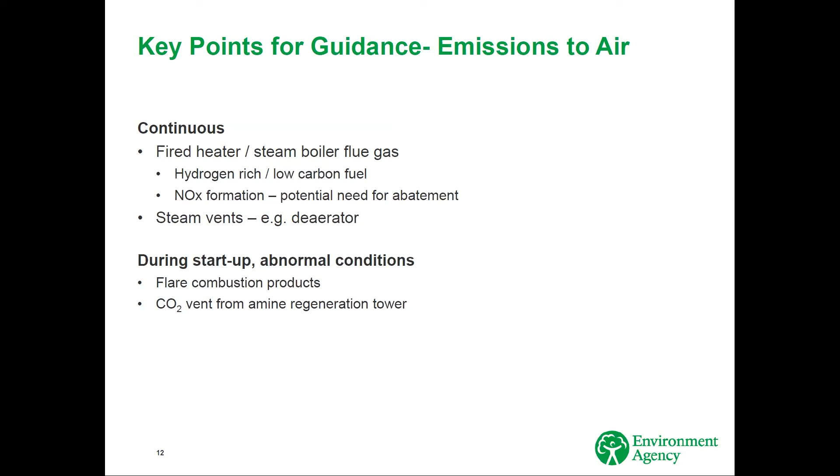And the carbon dioxide vent, there'll be some loss of CO2 potentially, and also loss of solvent or degradation products. So basically, you'll always need to do air dispersion modelling for these complex permits. Okay, thank you. That's the next slide, please.

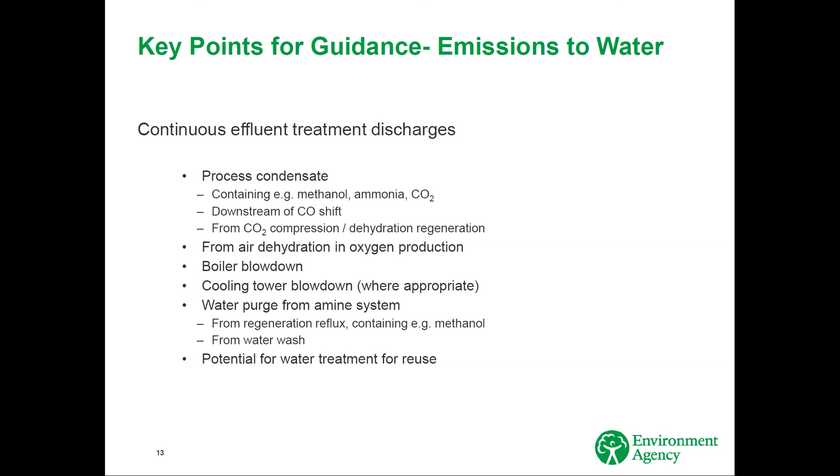Emissions to water, again, they're likely to be continuous effluent treatment discharges. So all those sort of usual aspects should be looked at for a large plant, which are just listed there. I won't go into any particular detail, but really water treatment and reuse should be maximised. There is potential for ammonia, amine compounds, etc. in waste streams, which need to be dealt with.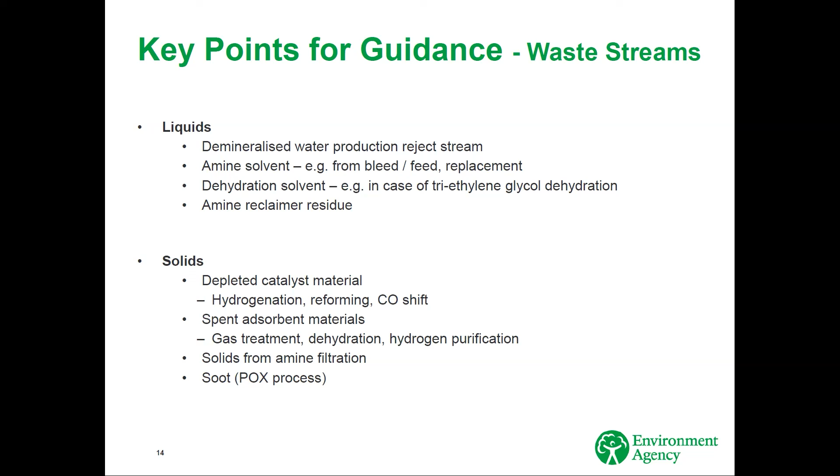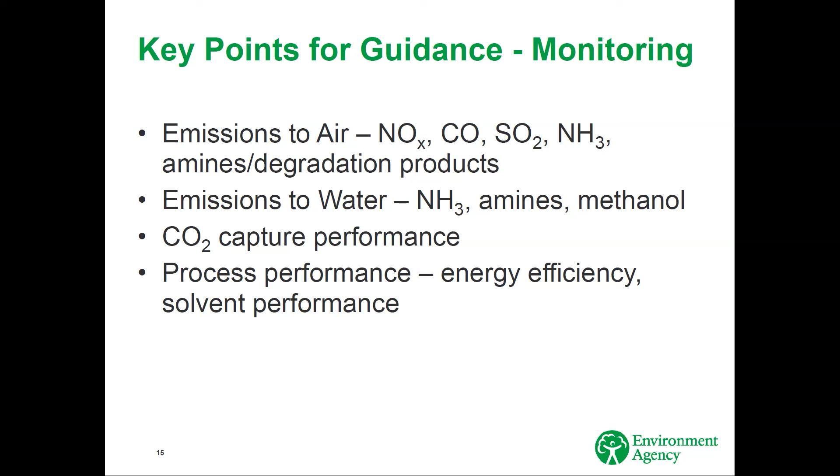Monitoring is obviously important for us to understand the performance of the plant on a short term, and on the basis of finding out more information about these processes, which are considered emerging techniques. So there'll be an intense period of monitoring, certainly during commissioning, I'm sure we'll require that, and then ongoing once the plant is up and running at a more steady state, to do continuous monitoring where appropriate on all emissions. And that includes CO2 capture performance, obviously, and the key process parameters such as energy efficiency and solvent performance.

Next slide, please. So what's the next steps on our BAT review? Well, it's complete. It's available on request. Just developing that and getting that into the format to put on our government website, .gov.uk. And I keep putting a date on here, but it keeps going back. So I'm expecting it to be early next year at the moment.

The BAT review will be referenced in that guidance document, and the BAT review will be published on the UK CCSRC website, I hope, which is very kind of John and colleagues to put it on there. It's also where our current BAT guidance is as well, for post-combustion carbon capture. Next slide, please.

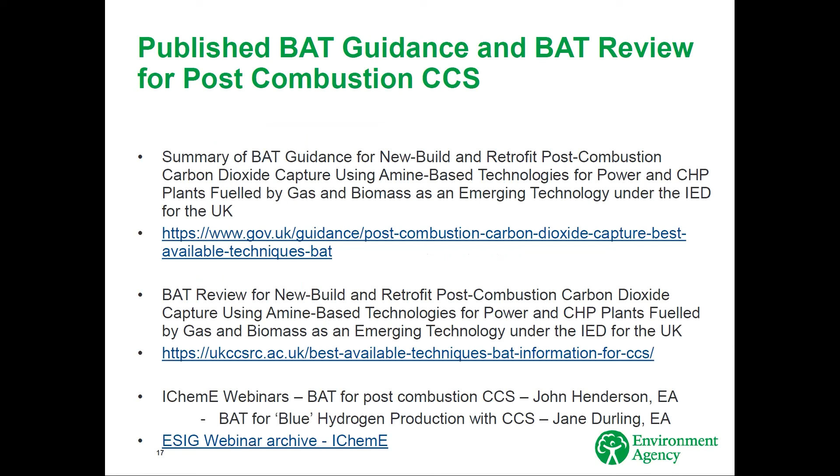So these are our current published guidance on post-combustion carbon capture. The link is there, and we've also got one on the BAT review. So the guidance and the review link there. And there are also some webinars that we've done previously, myself and my colleague John Henderson talking about this for the IChemE. If you're a member of the IChemE, you could access those.

Next slide, please. So future BAT guidance. We're just commissioning a project on hydrogen production by electrolysis to do the same sort of thing for that. And ongoing work to support post-combustion carbon capture and storage. You can read the projects there. Obviously, we're concerned about amine emissions and degradation product emissions. So we need to develop environmental assessment levels for those. Next slide, please.

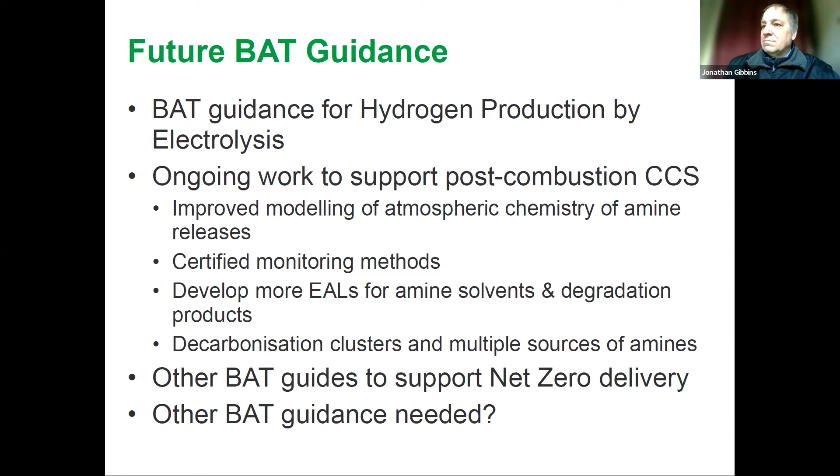So this is the hydrogen strategy. UK's hydrogen strategy has been published. The consultation on the low carbon hydrogen standard is now closed. So there is potentially a strong link there. We can help in terms of monitoring, reporting and verification aspects of the low carbon hydrogen standard against actual operator performance for these type of plants, and also for the hydrogen electrolysis plants when they get going.

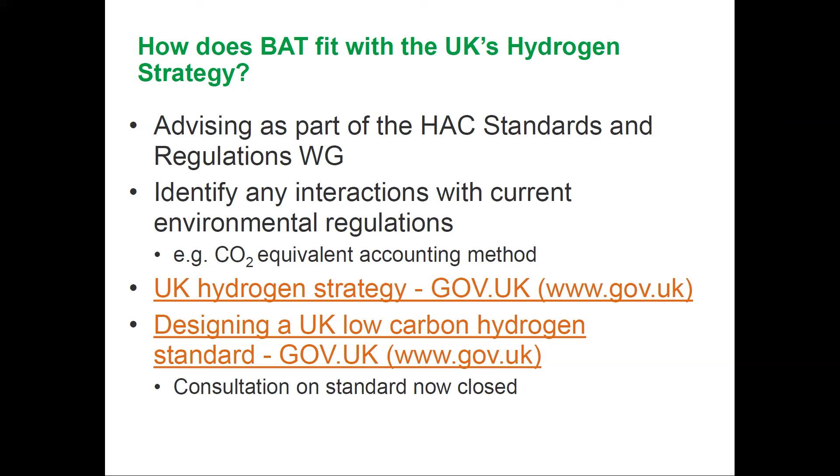So we're liaising with BEIS, the government department who are leading on this, and they're also funding some of the work. Next slide, please. Thanks very much.

Sorry, it's a quick whiz through, John. Oh, that's okay. It's very interesting.